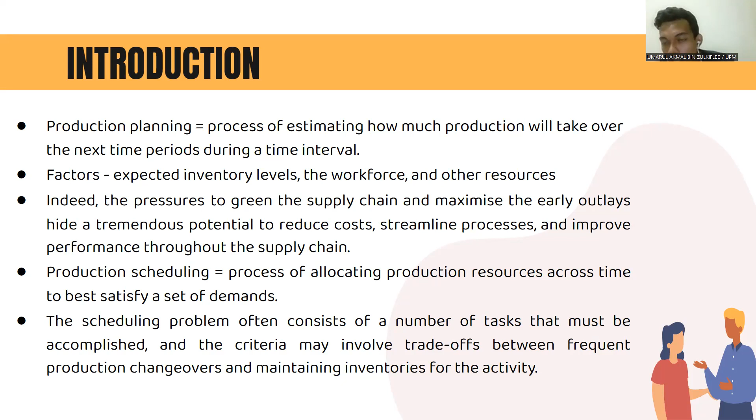Okay, thank you, Umarul. Next I will be presenting about the problem statement. Putra Production company is facing a production planning problem where the company would like to increase the number of products produced per day. The design capacity of the production department is 80 products per day, while the effective capacity is 64 products per day, and the actual output from the company is 64 products per day.

The efficiency and utilization can be calculated where efficiency equals actual output over effective capacity times 100, and utilization equals actual output over design capacity times 100. Okay, next slide.

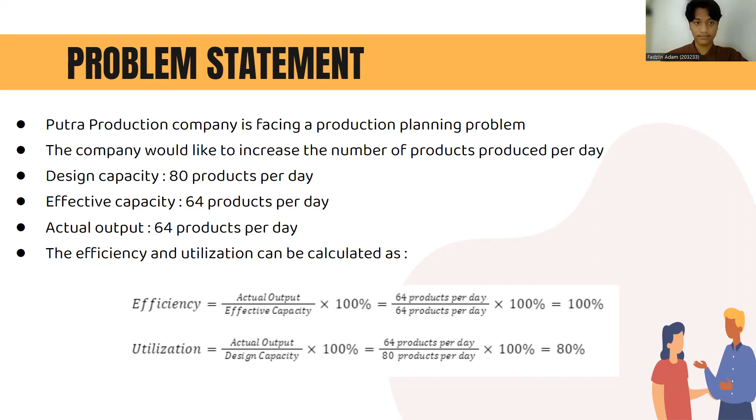So we proceed with the quality problem. Any situation in which the desired quality attribute is absent or not present at the anticipated level is referred to as a quality problem. The quality of product might be affected due to the following: machine unavailability and human errors.

As we know, different machines used depend on the design specification and process in the operating manufacturing of a bearing. Each machine had a separate availability period, and machines undergoing maintenance or unavailable for other reasons throughout the period would result in decreased output per unit.

Furthermore, human error may also contribute to the quality problem of the bearing. The dimension should be chosen in accordance with client needs prior to machine operation. Any incorrect input during the machining process may have an impact on the outcome, and the defective product will be rejected, reducing the volume output. As a result, this circumstance could affect how effectively and quickly bearings are produced. Thank you.

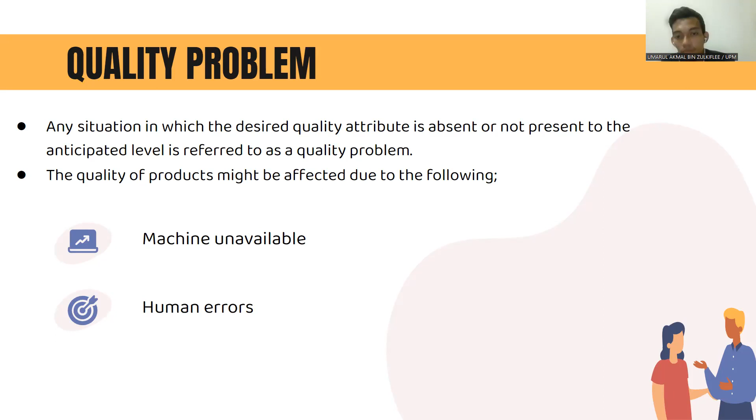Okay, next I will explain absenteeism. Absenteeism can be defined as unplanned absence from work by the employees. There are a few reasons for absenteeism such as sickness, family concerns, maternity leaves, unfavorable work atmosphere, long working hours, and others.

According to Mat Desa et al., the number of output, the processing period, and also the process capability are all proven to be impacted by absenteeism. In short, it is possible for the efficiency of the production line system to be influenced by the number of missing workers. The rate of absenteeism can be calculated by looking at the absenteeism percentage, which cannot exceed 5%, as typically 3% is regarded as the norm in most sectors. Next, I'll pass to Fadzlin.

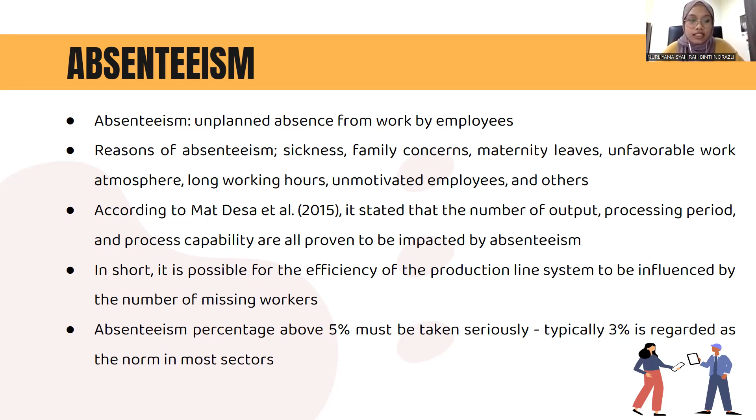Okay, thank you. Next I will be explaining scheduling and balancing. Basically, scheduling is simply the production planning model's short-term action plan. The actions taken in a manufacturing business to manage and regulate the execution of a production process are referred to as production scheduling. It is an assignment problem that describes in detail, in terms of minutes or seconds, which activities must be performed and how the factory's resources should be utilized to satisfy the plan.

There are a few types of production planning. Choosing the approach that works best for the manufacturing process in order to maximize the benefits of project planning is crucial. Some examples are the batch production method, the flow method, and the mass production method. Next slide.

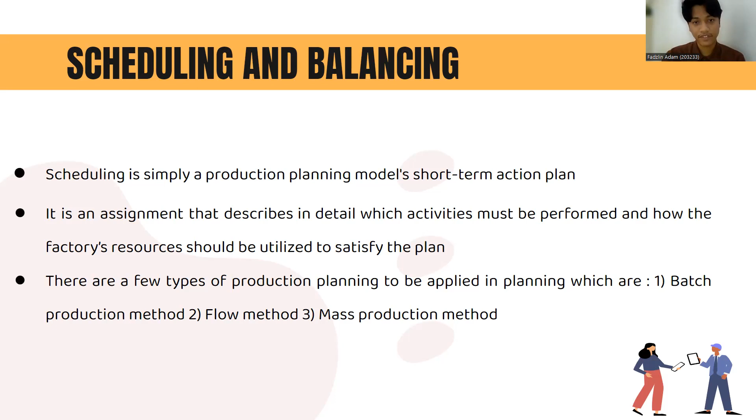Okay, so the first one is the batch production method, where batch production involves producing goods in groups. The second one is the flow method, which is a demand-based manufacturing strategy that shortens the lead time for production by accelerating the manufacturing process. Lastly, the mass production method is similar to the flow technique; it reduces manufacturing costs by operating on a much larger scale. Okay, next, thank you.

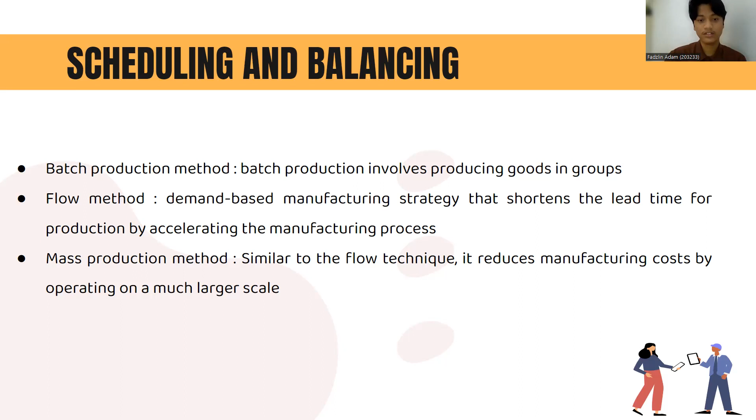So I will talk about factors to investigate and reasoning. We have three factors discussed, which is quality problem, scheduling and balancing, and absenteeism. So I will suggest to the manager of Putra Production Company that it is the quality problem and scheduling and balancing.

So for quality problem, I found that this is difficulties in bearing size take a long time, and the manager must ensure the staff is trained enough to operate the machine.

For next is scheduling and balancing. So the manager must include the activity that must complete first, and must ensure the staff is better aware of the sort of bearing required by the client to produce much greater scale. So this can increase the production per day.

So absenteeism is not included and not the one major factor, because production is still 100% based on efficiency and also still produces even if staff absent unexpectedly.

So next is a summary of a study from a journal. The journal is research from Momani 2011, to determine the factor affecting effective capacity in mobile transfer service, involving a case of Safaricom M-Pesa service that is famous in Kenya.

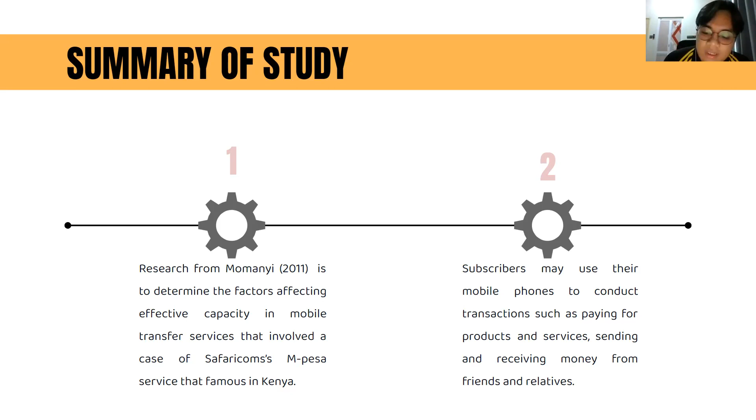So there are some challenges in M-Pesa, which is system delay in M-Pesa service and agent liquidity. For system delay, it is lack of enough float by agents in various outlets, and few agents in rural areas, which can be termed as low staffing.

And next is for agent liquidity. So a customer would take up a microfinance loan, get one large payment upfront, and then make smaller installments throughout the rest of their loan lifetime.

So these are two challenges included in balancing and scheduling, and also quality problem for that company. So I will pass to Sharif for next.

All right, thank you Akmal. So now I will be presenting the recommendations that we would suggest to the manager of Putra Production Company in order to overcome the struggles as mentioned before, which is quality problem and scheduling and balancing.

Assuming that the problems that they are having is quite similar to the case study stated by Akmal before, the first suggestion we would like to forward to the manager would be to reevaluate the company's personnel.

This is due to the reason that we believe the quality of the workers in the department, or maybe the quantity is too less, or the quality is too low, might be causing the department to have lower quality problems. So by increasing the quality through hiring better staff, better workers, or increasing the number of workers in the department, it could lead to solving the problem of quality issues.

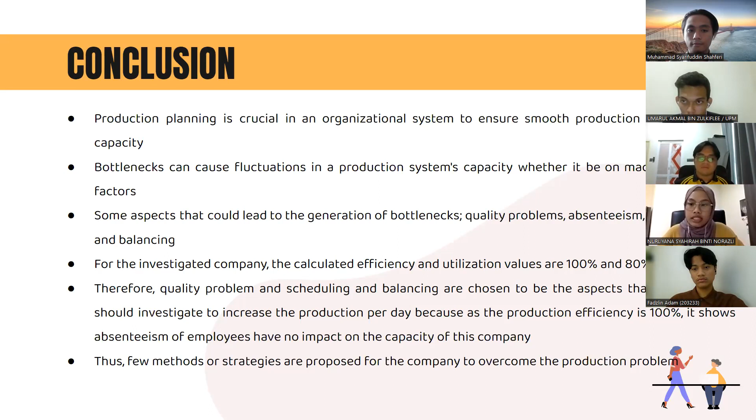So for the investigated company, the calculated efficiency and utilization values are 100% and 80% respectively. Therefore, quality problem and scheduling and balancing are chosen to be the aspects that the company should investigate to increase the production per day, because as the production efficiency is 100%, it shows that absenteeism of employees has no impact on the capacity of this company.

Thus, a few methods or strategies are proposed for the company to overcome the production problem. And that's all from us. Thank you.